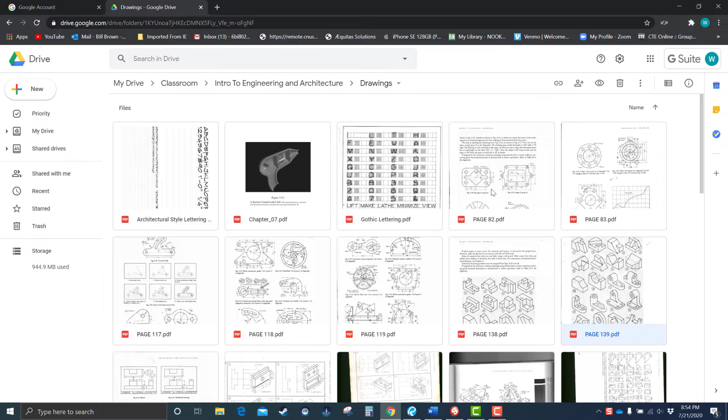Hi, this demo is going to be on S3, the gasket. It'll be on page 82. So if you look at page 82 here, I've got the PDF there. Let's open it up, and we're going to be doing the gasket S3 here.

Let's see if I can't make this just a little bit bigger here. Yeah, it's beautiful. All right.

So this one's going to start out very similar to the key plate. It's going to have a natural center point to it, so we're going to go ahead and do that. I would use a 0.5 - you have a 0.5 and a 0.7 pencil on this. Let me just show you my thing there - I've got a 0.7, my pink one's my 0.7 and my blue one's my 0.5.

So I like starting off with the 0.5 there. Make some nice light lines. We're going to start by making a natural center point, very much like we did on the last one. Just nice and straight there, hold my paper down so it doesn't move around a little bit, and just kind of get that straight. So we're basically almost dividing the paper into quadrants. Okay, something like that. My camera tends to focus a little bit, so once the light kind of picks up there, it'll start to focus in.

All right, so let's look at the part here and let's see what we got. Okay, I think what I want to do is I want to start by getting the center lines. This thing has 8 holes on it - 1, 2, 3, 4, 5, and then 6 and 7 and 8. They're all the same size, all 1/2 inch diameter.

So we're going to get the center points for the first 6 first - the 3 at the top and the 3 at the bottom. All right, they give you a 2.5 here and a 2.5 here, so we know they're equal distant, and we're going to do that first.

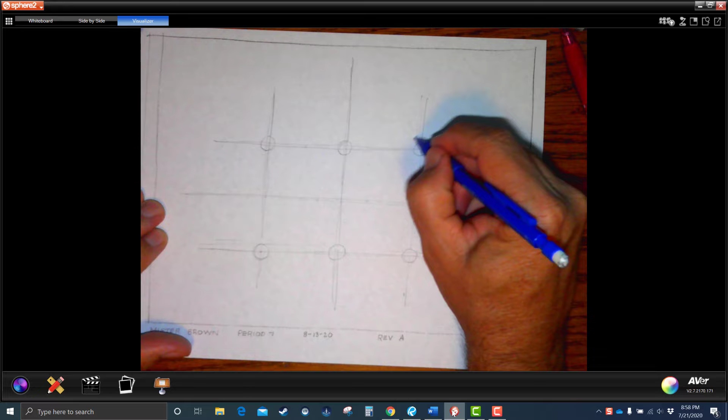So with a circle twice as big, almost like a donut, make the donut here, concentric circle. You might have to circle around a couple times until it feels good. It's really important you make these the same size because we're going to end up connecting them. And if you don't make them the same size, you have to have a slanted line to connect them. It doesn't really look right.

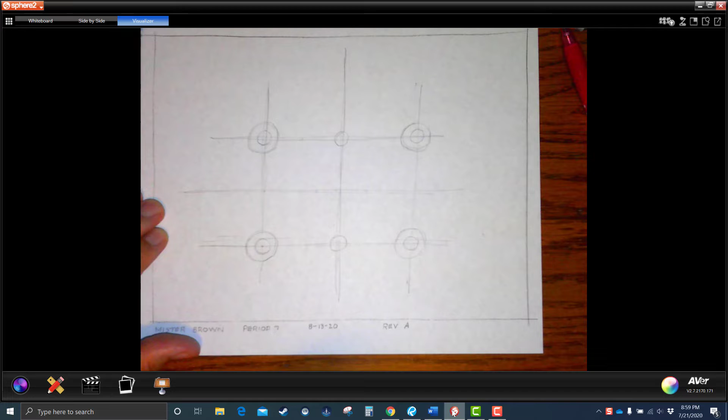Same thing here, and same thing here. Again, don't be afraid to erase if you don't like the way they look. What I'd like you to do now is make sure they're coming along. Okay, let's connect those. Now, if it looks like you have to do a slanted line to connect them, like it's not parallel to the center line, then fix your circle.

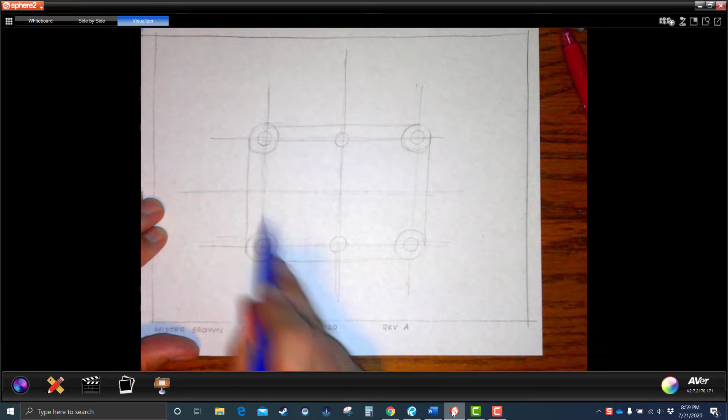Okay, so something like that. And also I want you to do it down as well, so you have to match them up both ways. Nice and light, don't do anything dark yet, and that way if you want to make a change, it's really easy. Again, if any of those lines are not parallel to the center line, then you need to fix it. Okay, so it should look something similar to that. Notice I haven't really erased anything yet.

All right, let's go back to the part. Next, we're going to get this center line in here, and then this is going to basically be the same size arc - you can see the 1/2 inch radius, and of course the same size holes. Now what happens on this one is this outside circle is tangent to this straight line coming down. So I'm giving you that part of it. So we're going to do this just a little differently because we recognize that relationship.

Here's the way you're going to do it: it's the same size as this outside one. So what we're going to do, with this being the outside part, is make the same size circle right there like that. And then we're going to find the center point, and then go ahead and put the circle in.

So a little different there. Same thing on the other side: make the circle the same size as the larger one, tangent to the straight line, and then put the smaller circle on the inside, concentric. Go ahead and plop a center line in there like that. So it should look something like that.

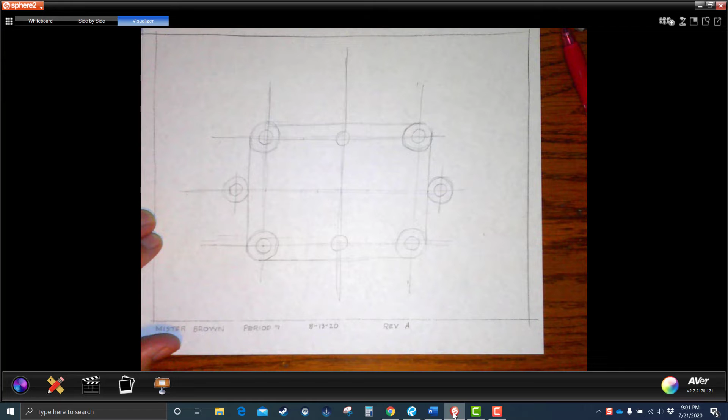They should be the same size as these larger circles. If it looks smaller, make it bigger. So like in my case, it looks a little smaller, to be honest. This does not look as good - it looks a little smaller than that one. So what you want to do is say, nah, not so much, and come back in and do it a little bit bigger. Maybe something like that. That looks much, much better.

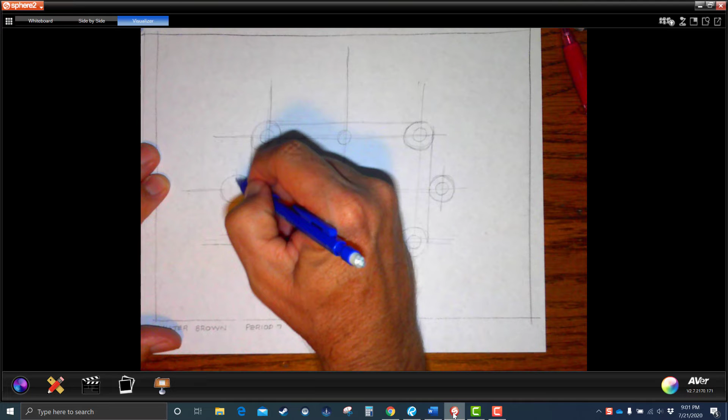And then put the center line back in, and we'll go ahead and get that smaller circle back in, same size as the other ones. On the other side here, I'm not that happy with that. I think it's still a little small, so I'm going to go back in and just make that a little bit bigger.

So you do have to self-evaluate on these. Sometimes you're not off by much, but if you can tell, it's off enough, and then go back and fix it. That's why we're doing everything light. And then that looks significantly better - those are all definitely the right size now.

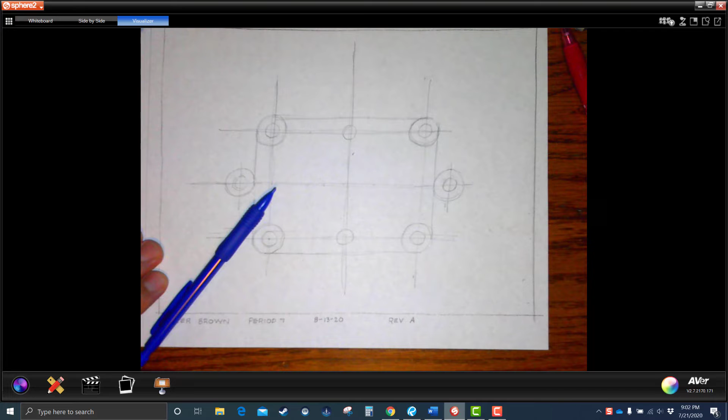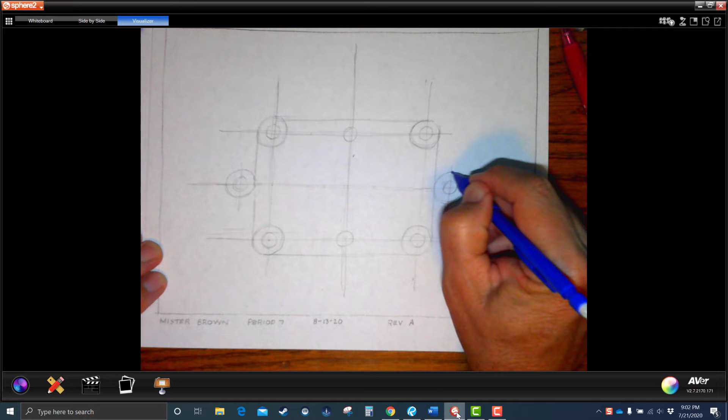Okay, so here comes the sneaky part on this one. There's some arcs right here - see the arc right there, and that arc right there, and that one, and that one. They're a radius of 1/2, which is the exact same size as the radius of 1/2 on this one. So here's what's going to happen: you're going to get arcs, these quarter circles, and they're going to wedge in like this. So what you want to do is make a full circle - it's going to look like a snowman if you do it properly.

And it's going to be the exact same size as this one. Do the same thing on the bottom. You'll see where I'm going here in a minute. I want you to make the entire circle. I don't want you to try to just kind of wedge them in like that. It doesn't look right. Just real light, tangent. So it looks like a snowman, basically.

So what's going to happen is it's going to go around, come down, go into the arc, and then come around and go into the arc and come around. So our geometry is there. It's looking pretty good. I'm pretty happy with what's going on right now.

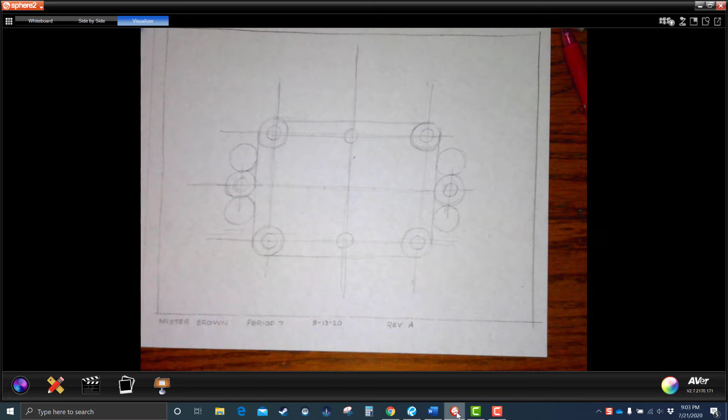So before I get the middle part here, I'm just going to start building this thing out. I'm going to erase the insides here because I'm going to put some center marks in, and I don't want those lines getting in my way. I want that to be a clean area. So on each area, I'm going to put in my little plus sign.

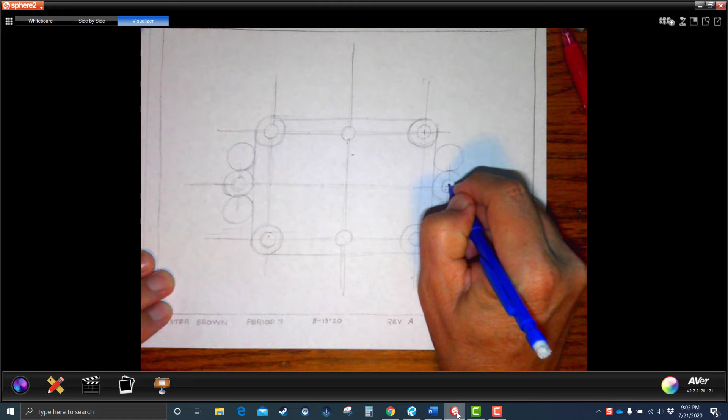Because as you know, the center lines, when they cross, we talked about this last time, is they're long, short, longs, and long, short, longs. So we really want that plus sign to look good there.

So the trick on these sketches is to put the plus sign in first. Now if you have the skill to make those cross perfectly, have at it. I'm not even good at doing that, so that can be kind of tricky. So get it right in the middle.

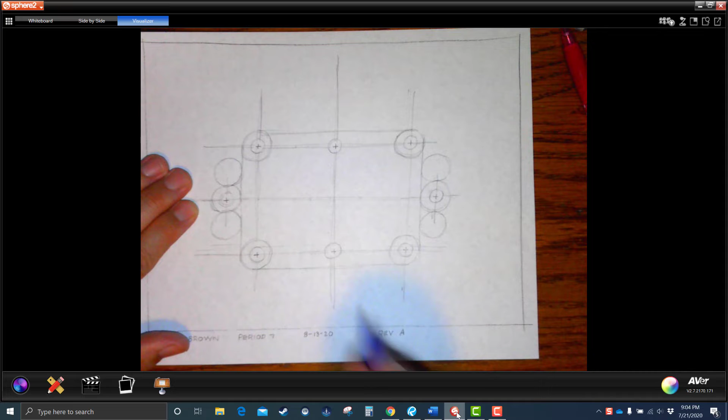Try not to go back over the lines. Try not to go like this and make it more than once, because you end up getting these big fat lines. And these should be thinner.

And then we're going to go ahead and make those center marks. So we'll make that there. And notice that I didn't run into my other one there. That's okay. So I'm going to just kind of knock these center lines in.

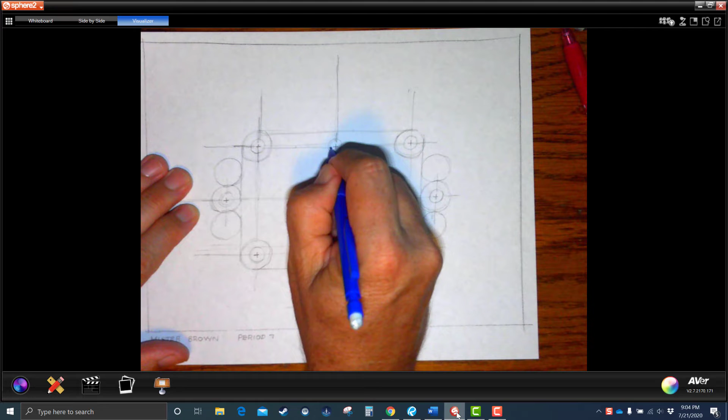I like darkening the center lines first. Run these guys together. And I like darkening the thing at the end, the main lines, the object lines.

And so I'm just running on here out and out, because we're using it for these arcs on the outside. Out and out, just past the circle, just past the circle. So it's just going outside the circles like that. We'll eventually connect those up.

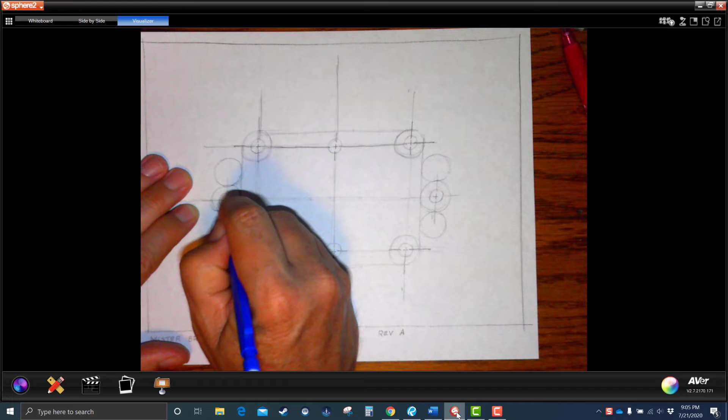Okay, that's looking pretty good there. How about this? So on these ones, we're going to go all the way out because we're using it for the whole half circle. Same thing on this side.

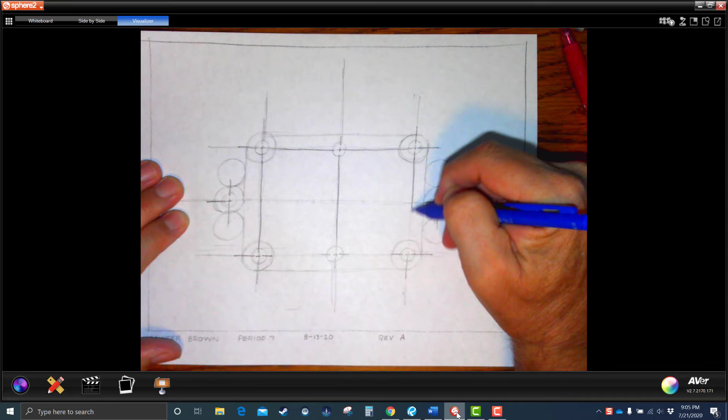So something like that. We know these are going to join, so we're going to go ahead and connect those. And these guys are going to join, we're going to connect them, and so on. So we're showing that there's a relationship between those circles. Same thing going all the way across here. I don't need a plus sign here because there's really nothing there.

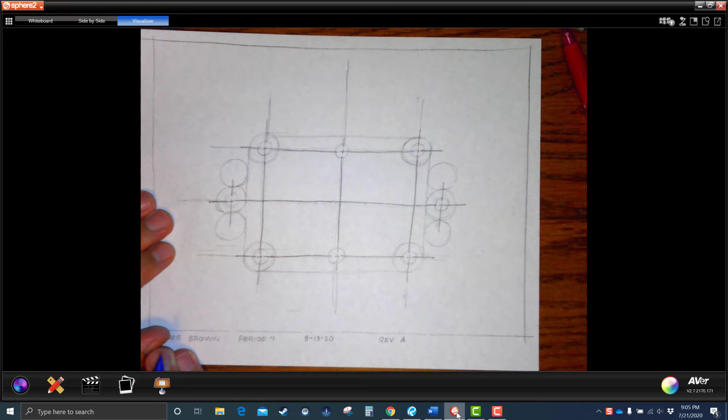Okay, I'm pretty happy with that. Let's go ahead and join these guys together and join these guys together. So you have something that looks kind of like that. I'm going to go ahead and give me one solid dark line on these. Again, I haven't done the middle part yet.

Arc. I like doing the arcs first and then connecting the lines to them. You can do this however you want to darken them, as long as it works for you. I think it's easier to connect lines to arcs than the other way around.

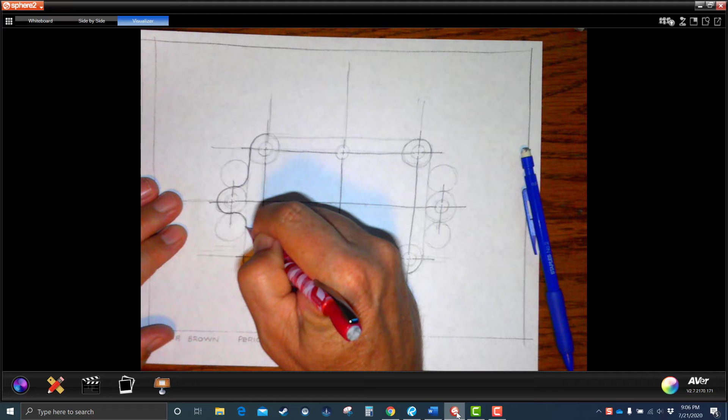I'm going to bring this around. It's going to go into the curve, tangent to this top part here, and then into the curve, and then straight. This one's going to go straight across with a point. So this is tangent right there. So it's going to go up and into the curve.

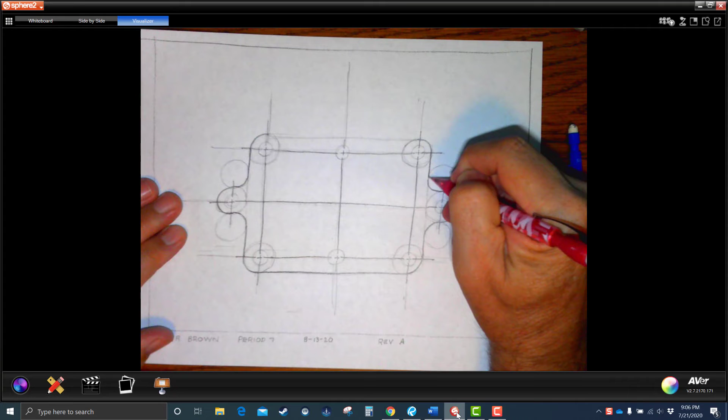So we're using the geometry from our free circles to make what is really accurate geometry for the part. I'm going to bring that down. And again, it's easier to connect a straight line to the arc.

Now if you have a situation like this, let me zoom in on this just a little bit. If you have something that looks like that right there, that's not good enough. It could be because your circle was too big, or you just hit it in the wrong spot. In this case, it just didn't work, I didn't hit it in the right spot. So what I'm going to do is go back and just erase this arc. This line had to come up in order to hit it, so I'm going to go ahead and just erase that.

So my arc, I just didn't do a very good job of drawing my arc. I'm going to draw it again. And then we're going to connect those up so it's tangent.

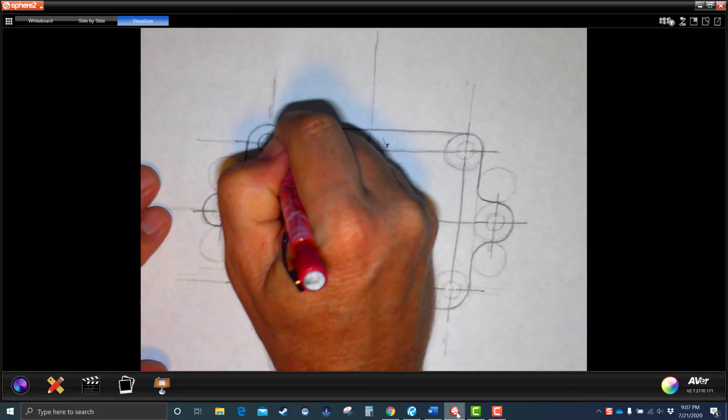Like so. Okay, you will want to darken the circles. The smaller circles are pretty easy to darken. It's the larger ones that get a little tricky.

Same thing with lettering. It's easier to letter smaller. Once you get the big stuff, it gets a little bit harder.

I'm pushing down pretty hard with my 0.7. You'll break your lead every once in a while, but you want to get that nice one solid dark line.

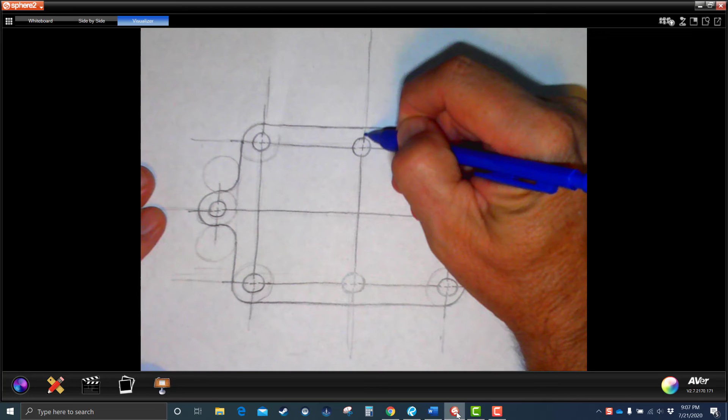And then again, you can self-evaluate and make sure you've picked up all your center lines. Oops, missed one there. There we go, this is actually darkened. It's just my camera's acting not nice right there.

All right, let's look at the inside. So let's see, agree that this distance right here between the center line and the top -- agree that that's how far down it's going to get to this line right here. I think that's right. And then this right here, not very far.

This is definitely more this way than this way. This almost looks like it just barely would miss the hole, but definitely less this way than that way.

So I'm going to form this rectangle first. Let's do that first before we get the arcs on the corners.

So, like I said, it's going to be whatever this distance is from here to here. That's how far down we want to come.

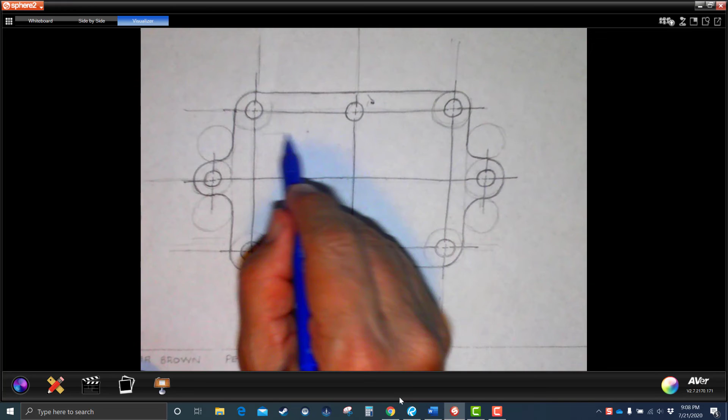So I'm going to grab up there, just a nice light line. Try to make that equal. That looks pretty good. Same thing here, come up that far.

You can even make two dots if you wanted to and then connect them, whatever works for you. The quicker you make the strokes, the better it works.

Now, we know that this side's bigger than this side. I think this one's maybe about right around there somewhere.

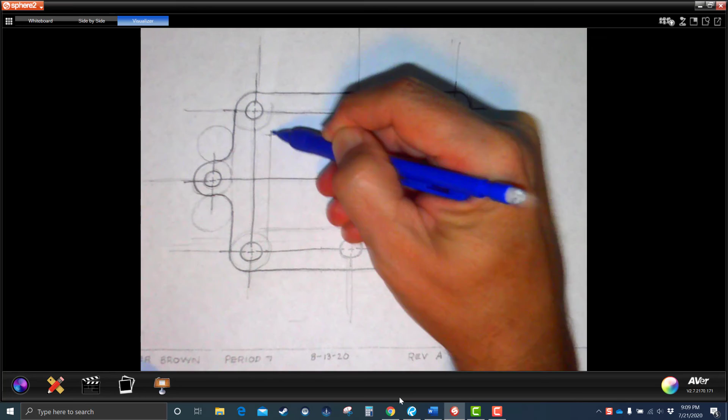Not as much, right? We know that it's just a little bit more. Right around, maybe like right around there somewhere, I think is what was happening, right? Pretty close to where the hole was, but maybe a little bit missing it.

Okay, so what we have is this rectangle on the inside. So what's going to happen on the rectangle on the inside is you're going to have these quarter radius fillets.

Now a quarter inch radius is half inch diameter. Kind of like a quarter is halfway across, then 50 cents would be all the way across, which happens to be the same size as our holes.

So these fillets is what they call these. They're kind of edges that are rounded over, and it's the same size as the hole.

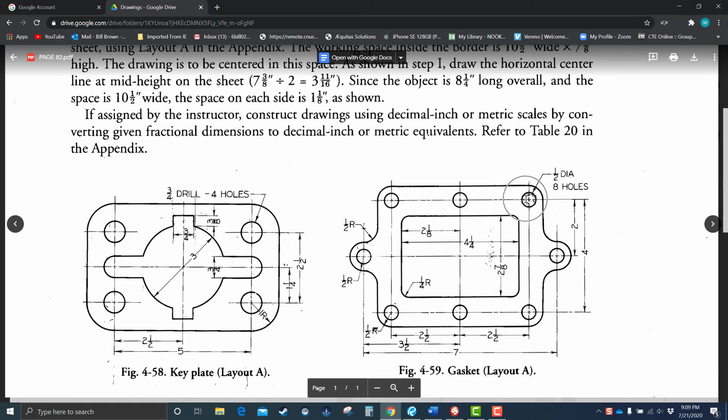So let's go back to the part. So when you make these, here's what I want you to do: be tangent, tangent, and be the same size as the hole.

I want you to make that tangent, tangent, and make the circle. It should be the same size as that. If it's too small, it's not good.

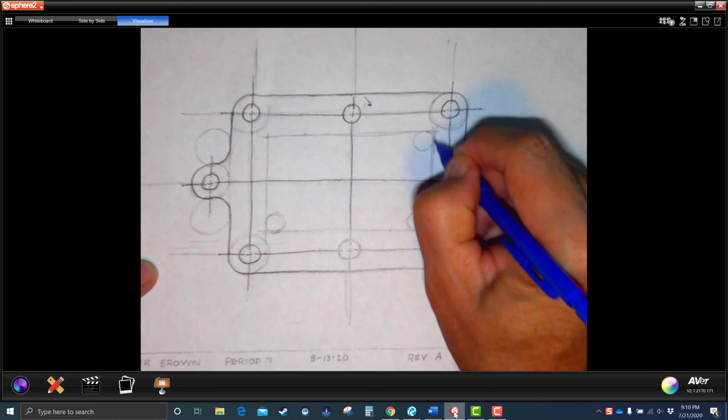So we want to do that and work it around and just kind of float it in that corner like a ball in the corner. Tangent, tangent, tangent. Same size as the holes.

All right, and then you just take your 0.7 pencil. Again, I like doing the arcs first, so I'm going to do that. Arc, arc, following the geometry that I put in there, and then join them.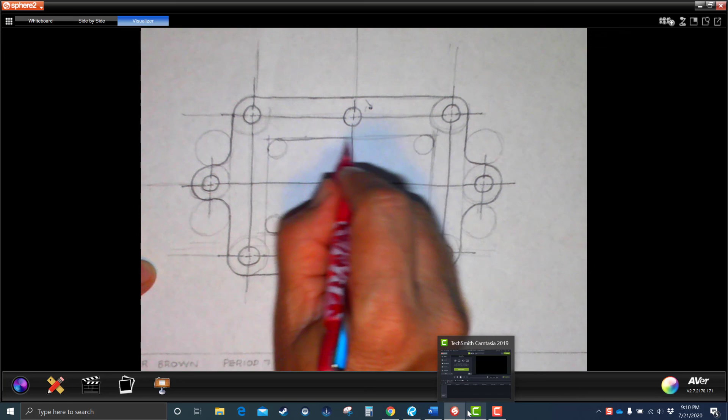I think I mentioned when I talked to you guys, I like the pencils with metal tips on them. Can you see the metal tip on that? Keeps the leads from breaking.

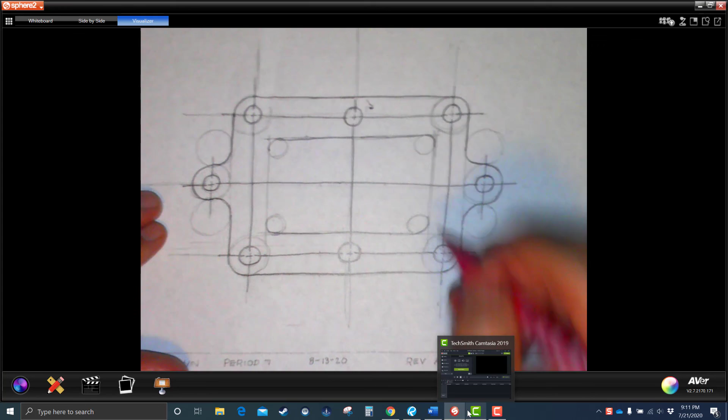If you have a pencil like this, like my 0.5, where it just has the plastic tips and the lead sticks out, you get a lot more broken leads, just FYI. The higher quality pencils tend to have better tolerances so you don't break your lead as often, but you'll need to invest in lead for sure.

So, one solid dark line, go over your good lines, something like that. So that is the gasket.

S3, so you would want to come down here on the bottom and throw an S3 in there. So it's name, period, the date, revision A.

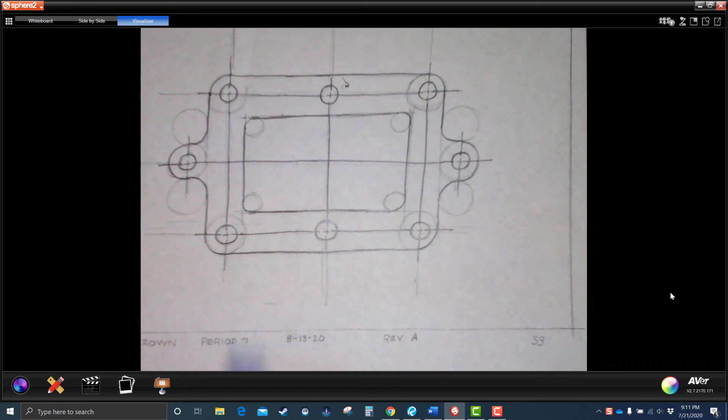So if you make a mistake on the sketch, and it's something you can fix pretty easily, you can just go back and fix the sketch, put revision B on there, and then turn it in again for a higher score. If you have a proportion issue, though, you're probably going to have to resketch it.

So take your time when you're laying out the lines and kind of get them right, otherwise you'll have to go back to resketching later on.

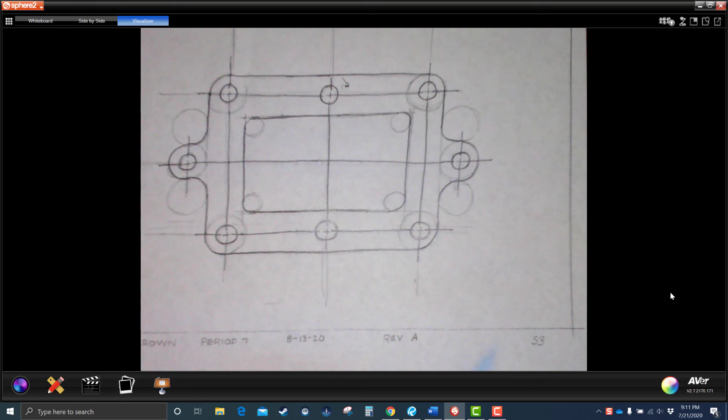Like I said, this bottom part is dark. It's just, see how there's a light coming down there, it's kind of making that thing look a little bit lighter there. All right, so there is the gasket S3.